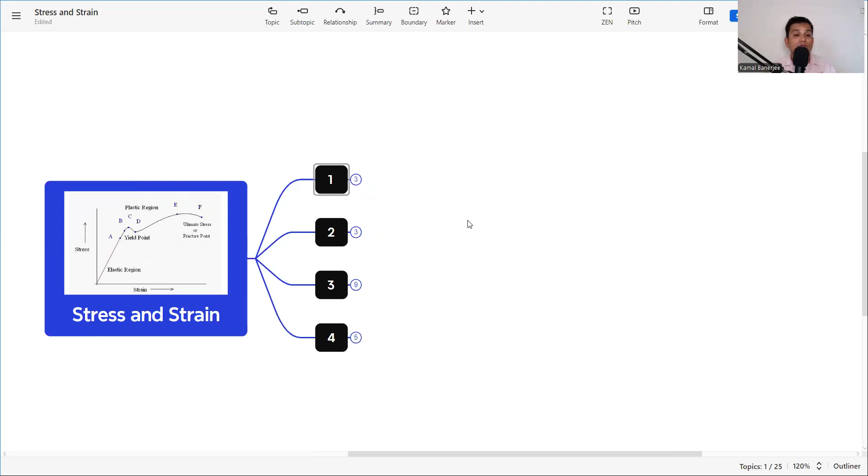So without wasting time, let's jump into the subject, that is what is yield stress and tensile stress. To know that, we need to go to the very basic, that is what is stress and strain, because it is related to stress and strain, and we can find out from the stress strain curve.

So let's start with what is strain. Strain is the measure of deformation representing the displacement between particles in the material body relative to a reference length. That means whenever an external force is applied on a body or a mass, it will deform. Either it will compress or it will elongate. So what is the change in deformation or change in length? That is called the strain.

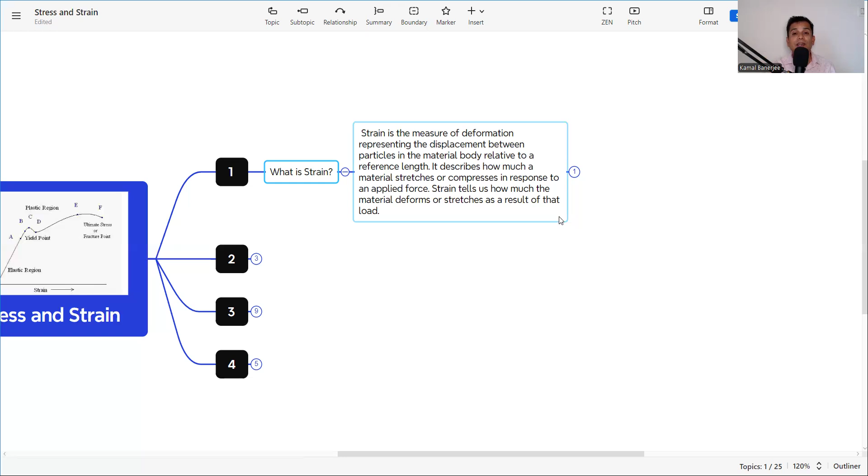It describes how much a material stretches or compresses in response to an applied force. So whenever we apply force, either it will compress or it will elongate. So what is the elongation or what is the compression? That length is representing as strain. Strain tells us how much the material deforms or stretches as a result of the load. So it is the identification that this much strain can be produced for this much load. So how much load that material can take, or how much strain can be developed, or how much load can be safely carried—that is why it's very much important to know the strain.

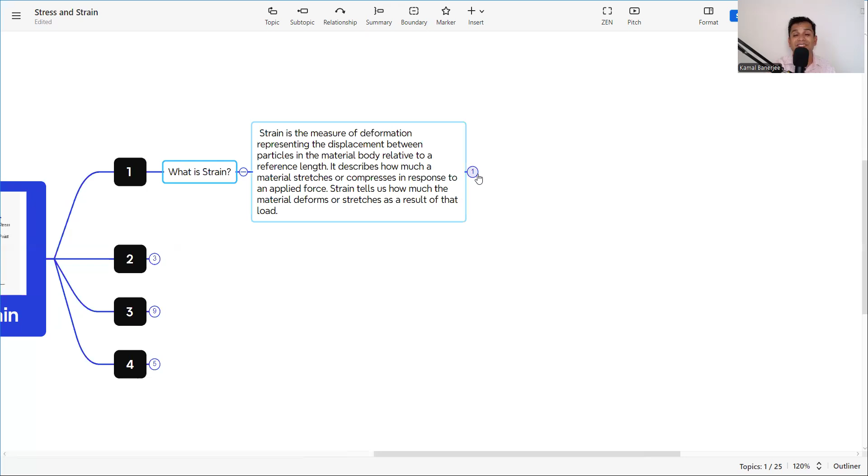Now, how to measure the strain? That is change in length divided by the original length, and it is expressed in percentage. So strain is a dimensionless quantity as it represents a ratio of length. Type of strain can be elongation, that's an increase in length, or compression, that is shortening in length. So let's take an example. If you apply a force to a rubber band and it stretches by 1 centimeter when its original length was 10 centimeter, what will be the strain? 1 centimeter divided by 10 centimeter, it is expressed as 10%.

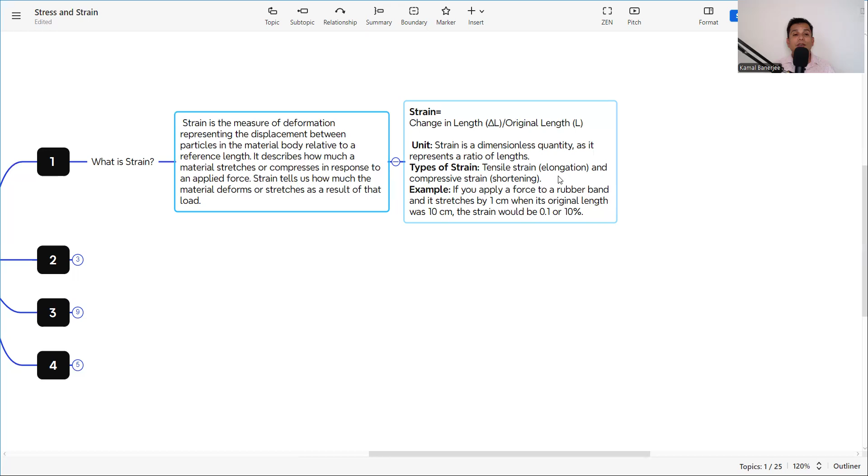So strain is 10%. So I can understand that strain is a measure of deformation under the applied force. Either it can be shortening, compressed, or elongated, and it is expressed in percentage, and it's calculated by change in length divided by the original length. So these are the strains. So whenever force is applied in a body, the strain is developed, and we need to know the strain. As for our concern, the steel, when the external load is coming, the strain will develop inside it.

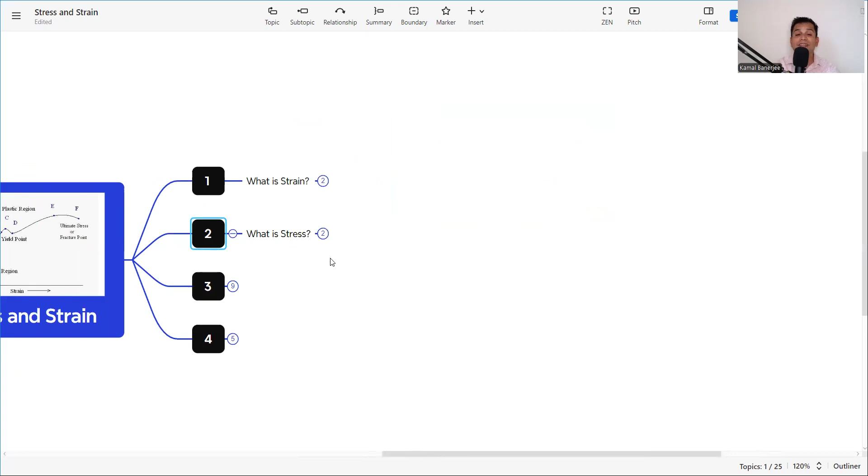So when strain is developing, next comes the stress. So strain is developing under the external load. Then what is stress? Stress is defined as the internal force per unit area that resists deformation in material when subject to an external force. So that means whenever the external force is applied on steel or any body or material, we know that strain is developing. But under its own property, what is happening? It is resisting that external force. So it needs to keep its position fixed. That is why the stress is developing.

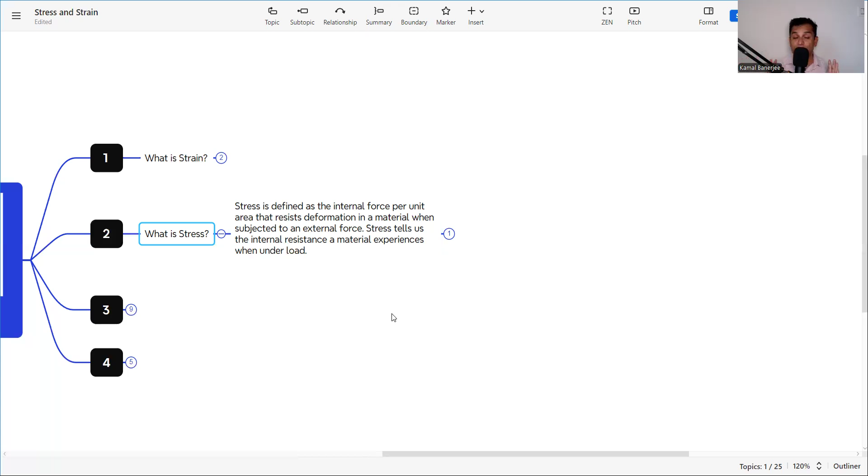So stress tells us the internal resistance a material experiences under load. So under the external load, how this material will resist itself, that is the measure of stress. So first, under the external loads, the strain is developing, and when the strain is developing, it has the property that it wants to resist that strain or resist that force. And what is the measure? That is the stress. So how is it measured?

The area divided by the force - it is a measure in Pascal, PA, or Newton per meter square. So it is force per unit area, not area per force. Let me clear it out and write it down: force divided by area, that is it. So it is measured in Pascal or in Newtons per square meter, or any other pressure unit.

So type of stress: tensile stress, compressive stress, and shear stress. In reinforcement bar, the tensile stress is developing, so we need to know what is tensile stress. Now stress can be tensile, compression, or shear - what is the measure? It is the internal resistance that develops whenever strain occurs under applied forces. When you pull a steel rod, the material inside resists this pulling force, and the amount of force per unit area is called the tensile stress. Now we know what tensile stress is.

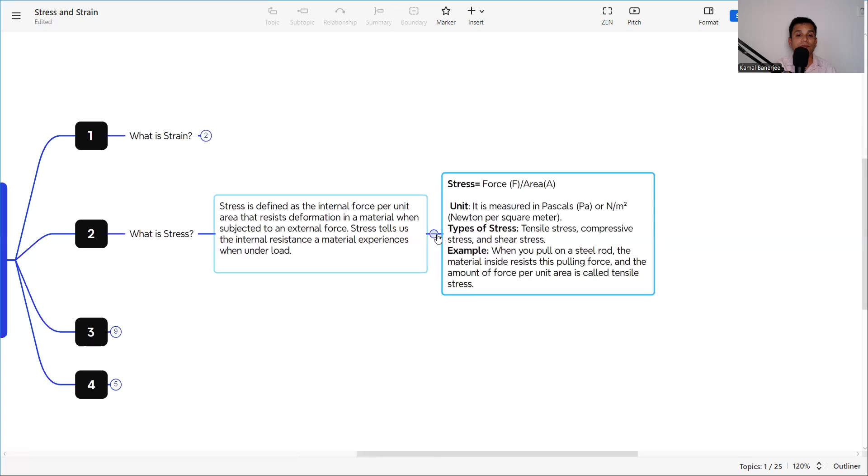Now we need to see the stress strain curve, so it will be clear again. Now it is clear what is strain and what is stress. Now we need to know what is a stress strain curve. This is the strain, this is the stress, and this is the load. So whenever we apply load, stress is developed, and according to the stress, strain is also generated inside the body. So whenever we make a stress strain curve, the curve comes like this.

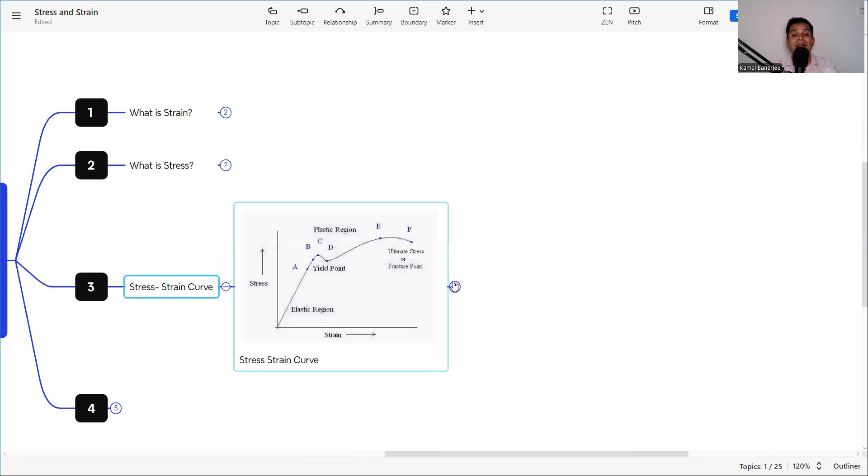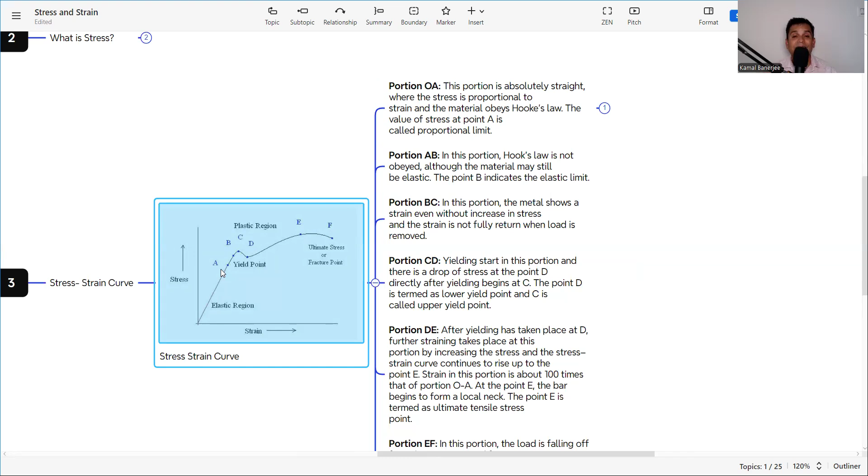Now what does it represent? First, the point O to A - from O to A this portion is absolutely straight, where stress is proportional to strain and the material obeys Hooke's law. The value of stress at that point is called the proportional limit. That means whenever load is applied, strain develops, and accordingly stress also develops - that is the internal resistance, and it obeys Hooke's law.

Now what is Hooke's law? We know that Hooke's law is the principle in physics that states a force needed to extend or compress a spring by some distance is proportional to the distance. So whatever force is required to extend or elongate, that is Hooke's law. Hooke's law is applicable as long as the elastic limit holds.

That is the elastic limit, and within the elastic limit Hooke's law is obeyed. So from point O to A, whenever force is applied, deformation or stress develops, strain is generated, and when the load is removed there will be no stress, and it will return to its original position. So permanent deformation will not happen - it returns to its shape after the force is removed. Hooke's law is named after Robert Hooke in the 17th century, a British physicist who first formulated this law, which is why it is known as Hooke's law.

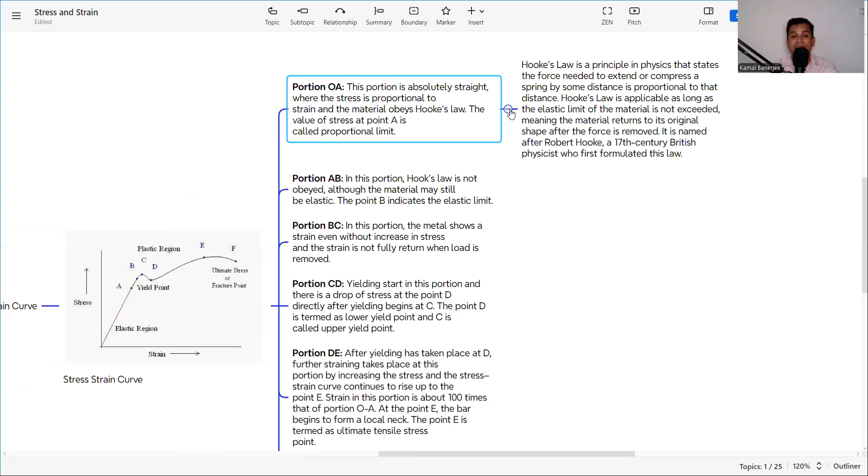So point O to A is the portion called the proportional limit. Now, point A to B is the portion where Hooke's law is not obeyed, although the material may still be elastic. So point B indicates the elastic limit - after point A, it starts in the elastic limit from A to B, but it's not following Hooke's law. Now, point B to C.

B to C is the portion where the metal shows strain even without an increase in stress, and the strain does not fully return when load is removed. So in that portion, from B to C, strain develops without the stress indicating an increase, and it cannot return when the load is removed.

Now again, if we apply more load, then it will come like this - from C to D, it will not increase, then it will decline. At point C to D, yielding starts at this portion, and there is a drop of stress at point D. So whenever we give applied force, stress develops and generates, and after C, the developing stress drops - D is the yielding point that begins at C, directly after yielding begins.

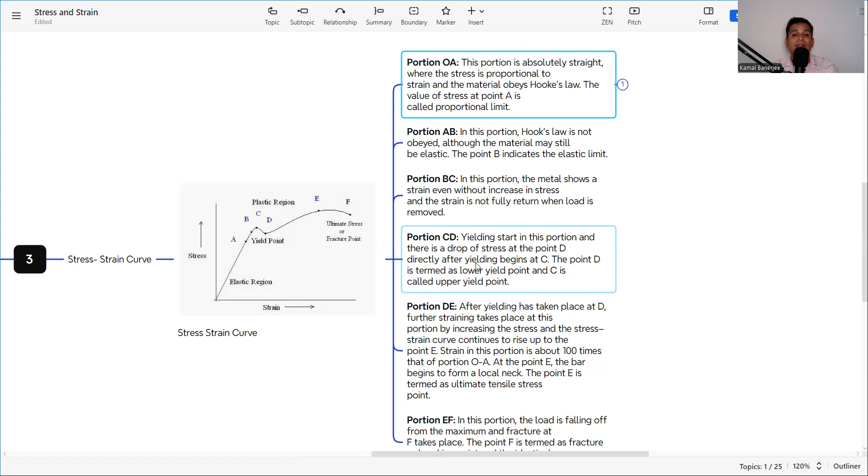Yielding is starting at point C. The point D is termed as the lower yield point, and point C is called the upper yield point. So this is the yield point or the plastic region point. Whenever the stress is coming at point C, it is the upper yield stress, or at point D, the lower yield stress. Actually, we are taking this upper yield stress.

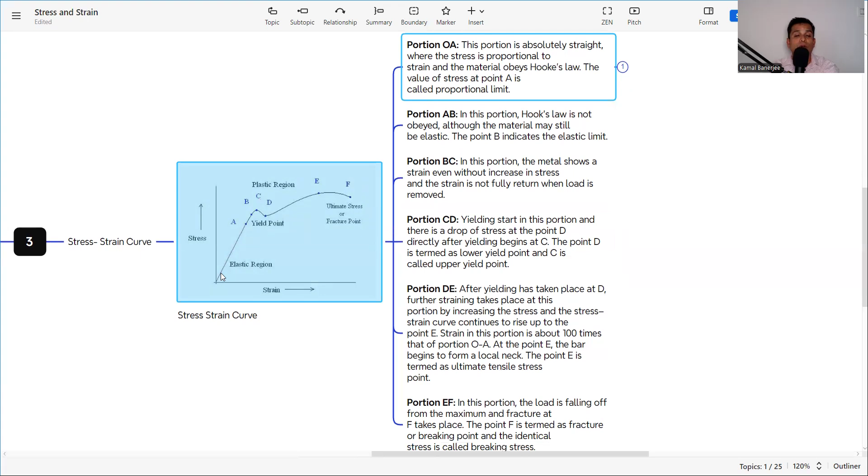So whenever coming to point D, if we again increase the load, after yielding has taken place at D, further straining takes place by increasing the stress, and the stress strain curve continues to rise up to point E. This portion is about 100 times the portion of O-A. At this point E, the bar begins to form a local neck.

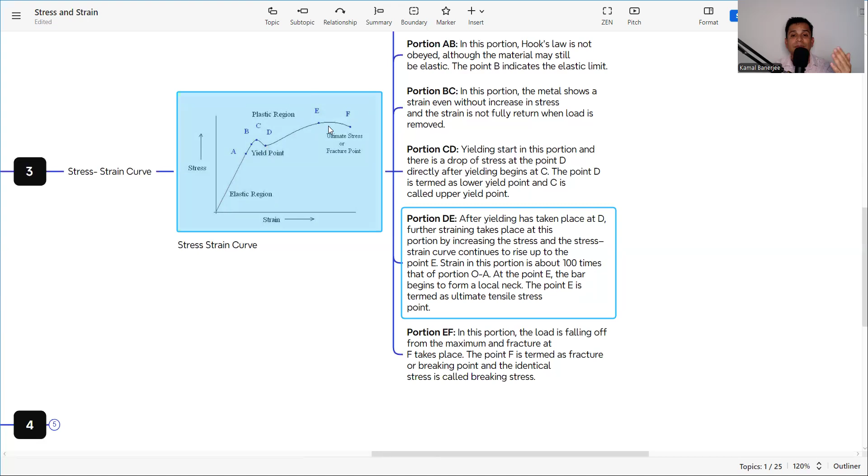The point E is termed as the ultimate tensile stress. Point C becomes my yield stress, and after the lower yield point, if we increase the load again, the stress increases up to point E, called the ultimate tensile stress. The portion E to F is where the load falls off from the maximum, and fracture at F takes place. The point F is termed as the fracture or breaking point, and the corresponding stress is called breaking stress.

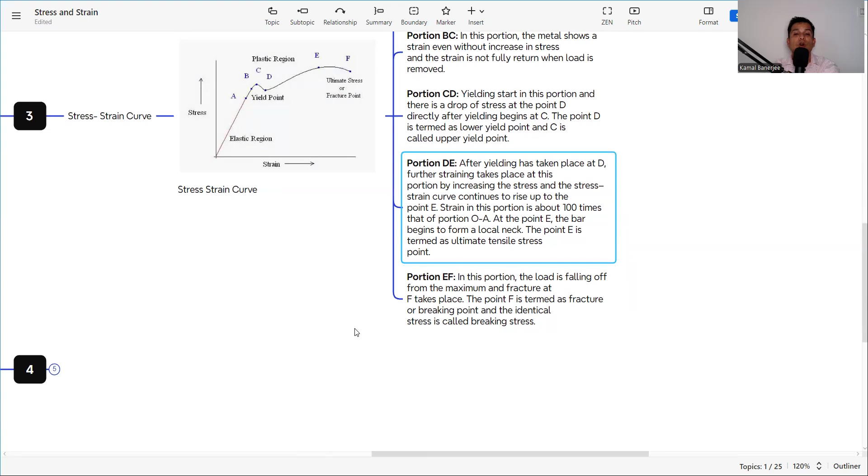So from this curve, let me zoom in. Point O to A is the elastic region, this is the plastic region, and this is the fracture region. Point F is the fracture or breaking strength. Point E is the ultimate tensile strength, and point C is the yield stress.

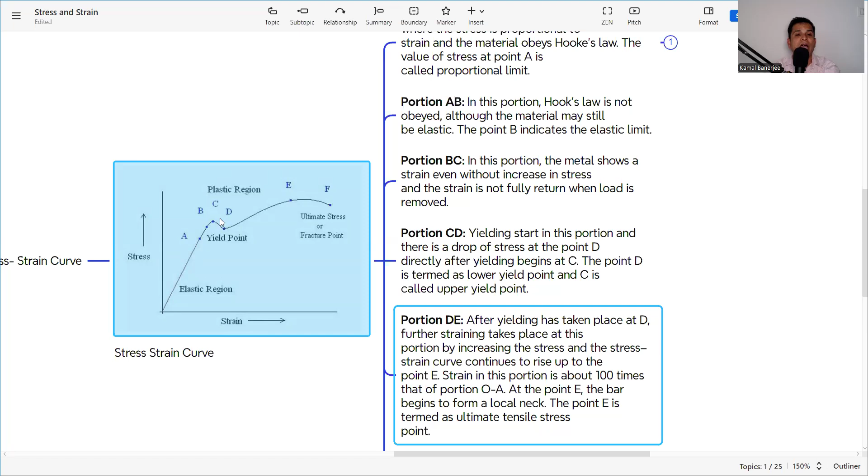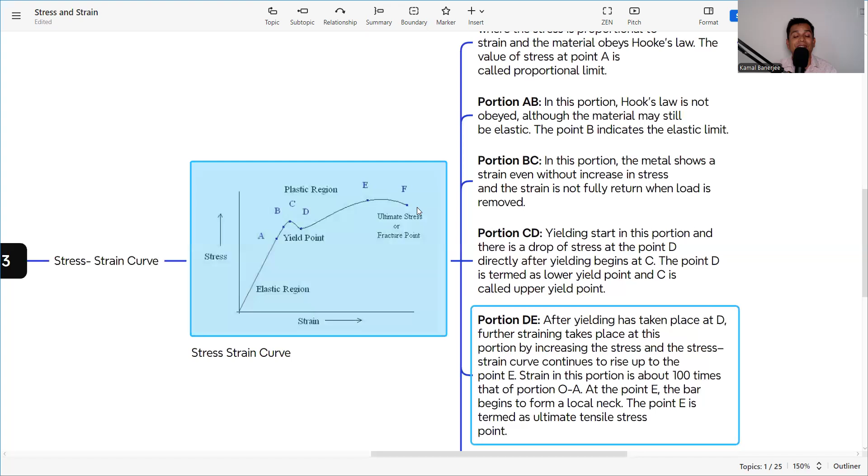So whenever we are performing the tensile test or finding the yield strength of the reinforcement bar, please note what this yield strength point means: it is the yielding region, and it is on the plastic region, and the maximum force point, and the fracture point. This curve is very much important whenever we are performing a stress strain curve for the reinforcement. So this is about the stress strain curve, the yield point, the stress point, and the breaking strength.

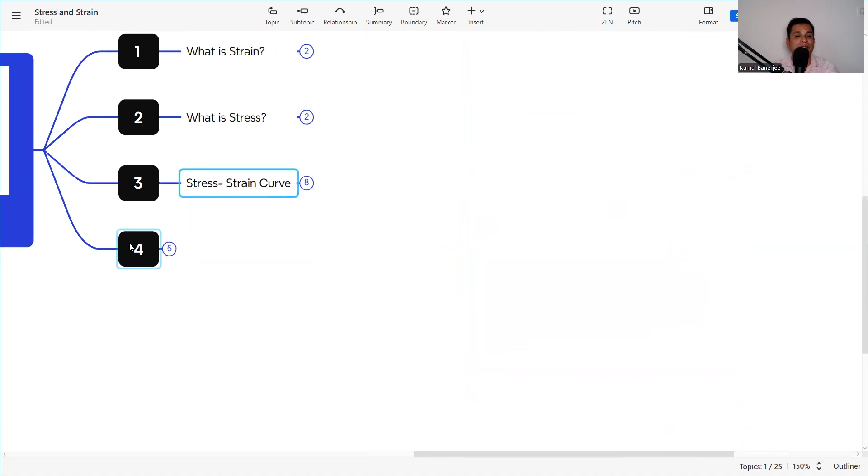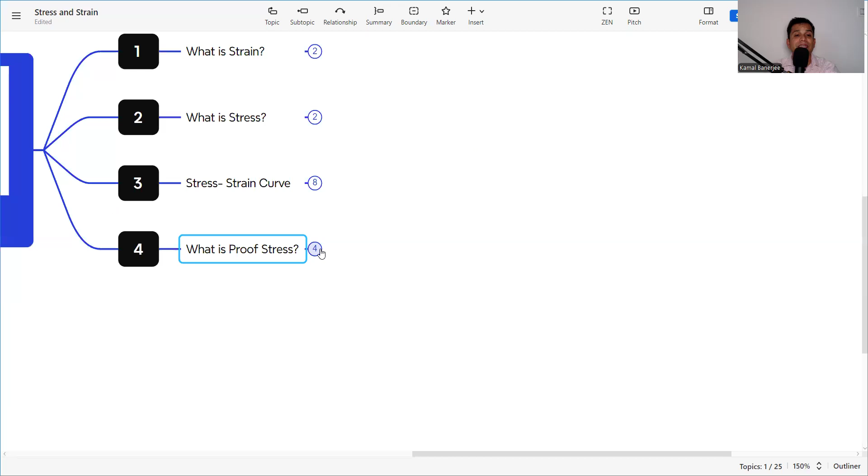Now, some materials do not show exactly the yield point, such as aluminum alloy or high carbon steel. They do not show the exact yield point. So how can we determine the yield point? Here comes the proof stress. What is proof stress? It is the 0.2% proof stress.

The 0.2% proof stress, also known as yield strength, is the stress at which a material shows a specified amount of permanent deformation, typically 0.2% strain, instead of waiting for the exact yield point which might not be easy to detect. For aluminum alloy or high carbon steel, we cannot detect it exactly, so we take 0.2% strain as the load that becomes the yield point. Engineers use 0.2% proof stress as an approximation to determine when a material begins to deform plastically.

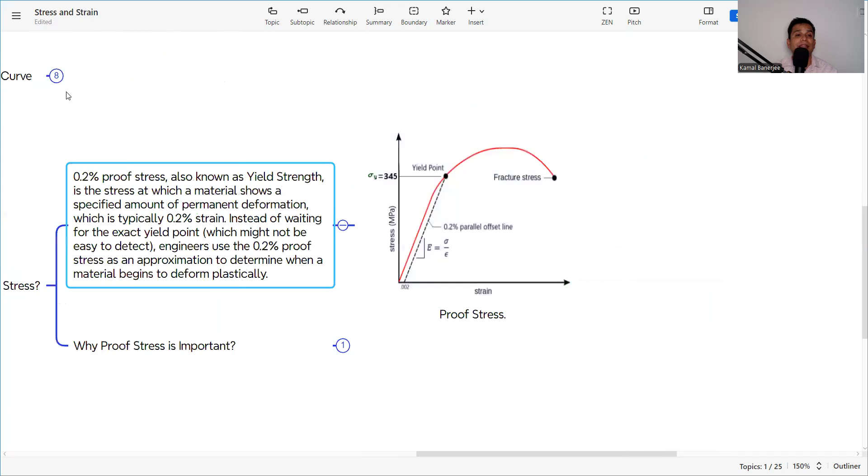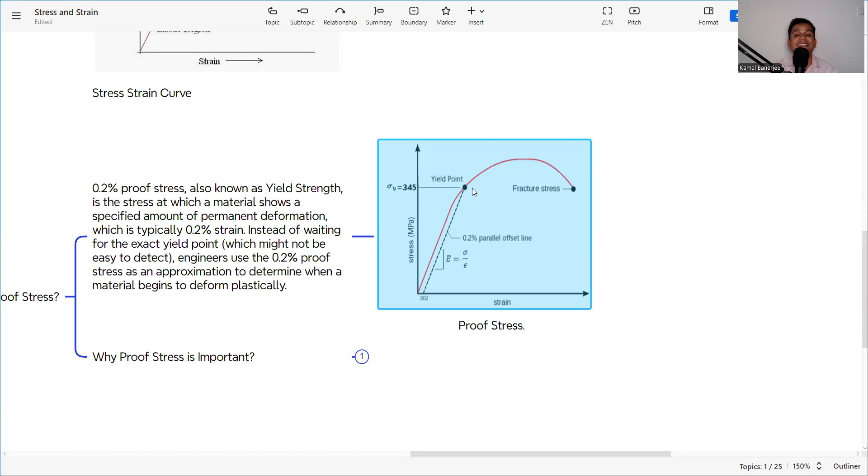So here the curve comes like that. Every point is well defined in the normal curve, but here it is not well defined, it just shows like a fracture stress. So what we do: for 0.2% proof stress strain, we make a parallel line, and when it hits the stress strain curve, the corresponding stress is called the yield stress, in case we are not getting the exact yield point like this.

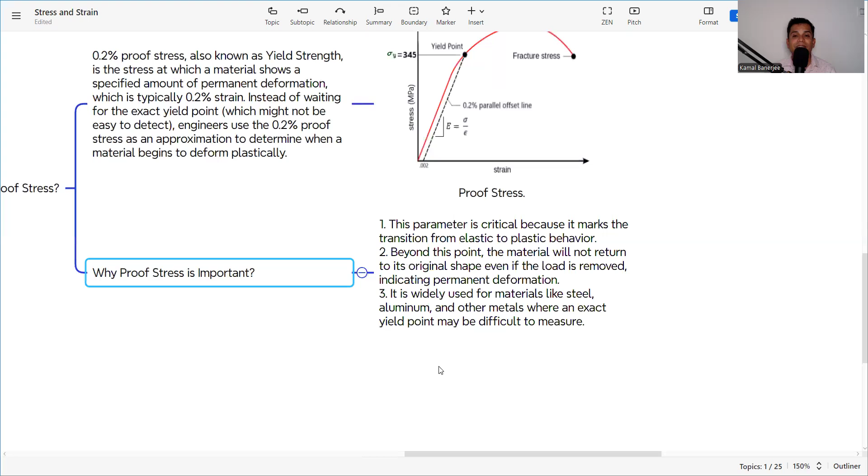Why is this proof stress important? Because this parameter is critical, as it marks the transition from elastic to plastic behavior. Beyond this point, the material will not return to its original shape even if the load is removed, indicating permanent deformation. It is widely used for materials like steel, aluminum, and other metals where an exact yield point may be difficult to measure.

So these are the things about tensile stress, yield stress, proof stress, and the stress strain curve. I hope you find it useful.